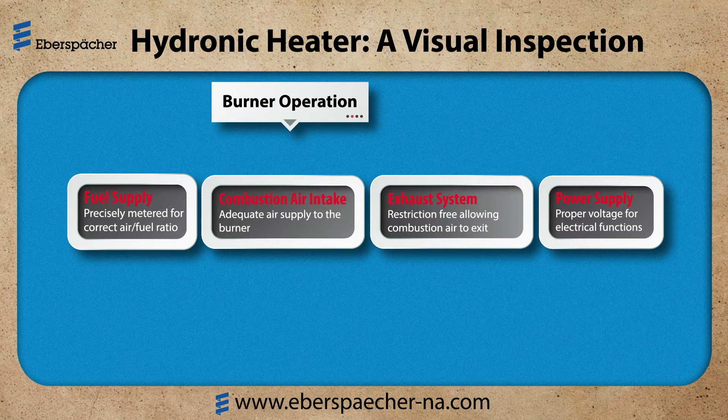Today we're going to go over a visual inspection on a hydronic heater. Let's start with the basics: burner operation, fuel supply, combustion air intake, exhaust, power supply, and connections. We need to keep these things in check for the burner to operate properly, essentially maintaining the correct air-fuel ratio.

Next is the system operation. It's all about the coolant throughput, or the flow of coolant through the heater and all the hoses and components. I always compare our heaters to a diesel engine. Obviously they're much smaller, so some of the things that you think may not affect the engine could have an impact on our heater and how well it operates.

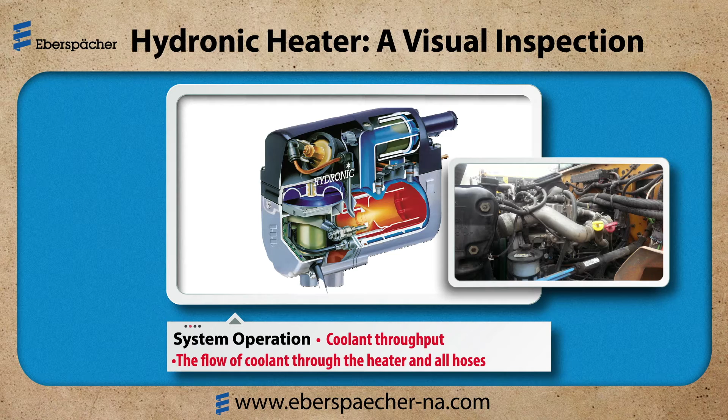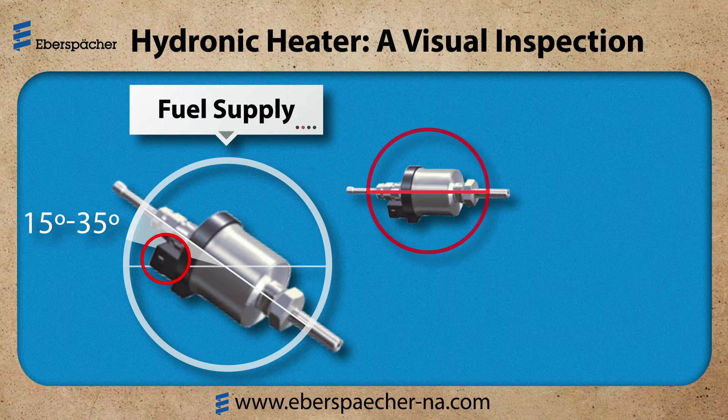First, let's take a look at the fuel supply. The fuel metering pump should be properly mounted at a 15 to 35 degree angle. The electrical connection is on the output side of the pump and should be at the top. If the fuel metering pump is mounted flat or upside down, it will overfuel the heater or could trap air, causing the piston to cavitate. We also need to make sure that the fuel line and wire harness are properly supported and there's enough slack to allow for cab movement.

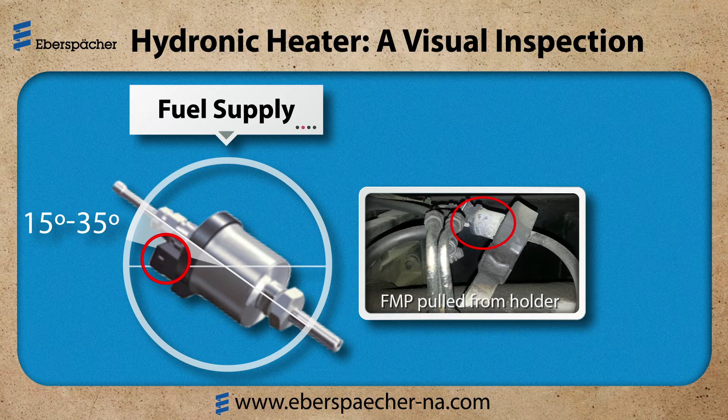In our examples, example number 1 shows an older application. The fuel metering pump is properly mounted, lines and wire harness look good. Example number 2 is a brand new installation. They did not install the bracket that would hold the pump at the proper angle.

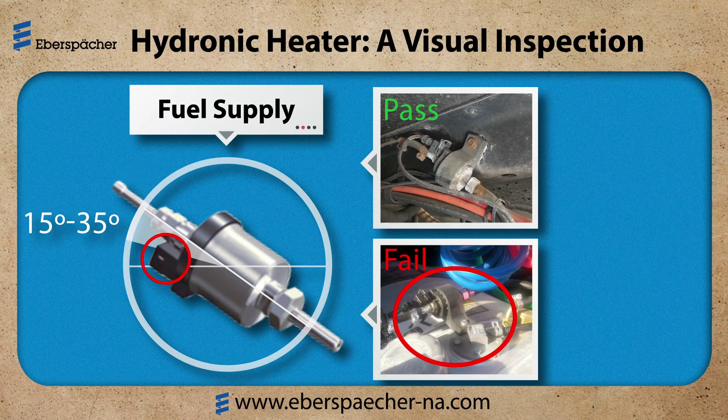Next, we'll take a look at the combustion air intake and exhaust. The length and number of bends in both of these combined will affect how well the air flows through the burner. We want to make sure there's neutral air pressure, so the ends of the pipes are away from the direction of travel. They should be pointed downward at a 15 degree angle, properly supported without any low spots or any tight bends.

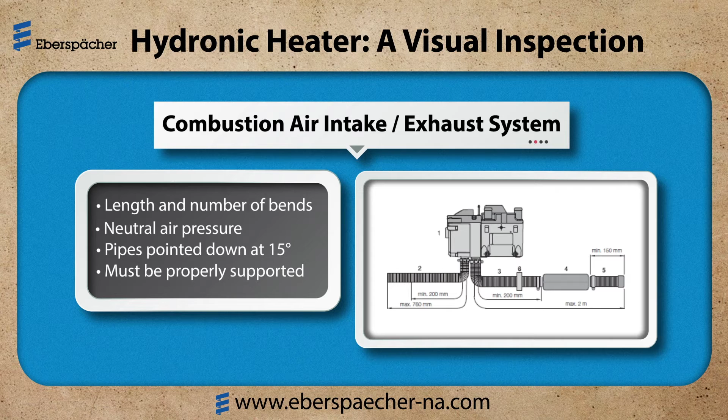Let's take a look at some examples. On the combustion air intake, I have the factory installed rubber boot. This should be at the 6 o'clock position. If it is in the 9 o'clock position, it needs to be rotated downward. This will prevent debris and road spray from entering the intake and getting into the fan motor.

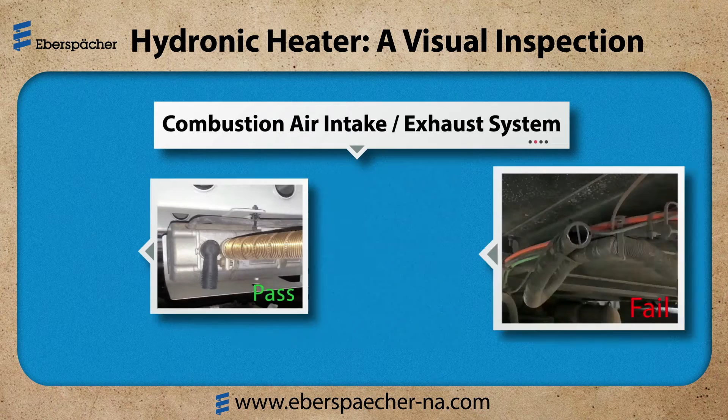On the fail side, I have the flexible air intake coming out to the outside of the cab, and it has a low spot in it. This will collect debris and condensation and cause a restriction.

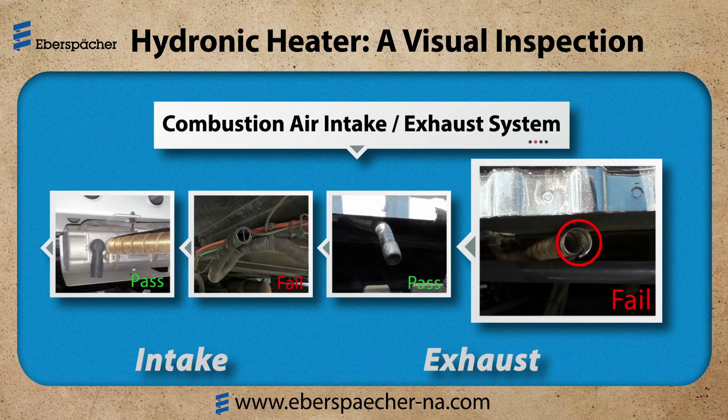The exhaust should extend past the back of the cab and be angled downward. If it is not supported properly, or if it is too long, it can uncoil and break off, as in our other example. This is broken off underneath the cab, and now I have exhaust that could potentially get inside the truck.

Next, we'll look at the power supply, wiring, and connections. Make sure that the wire is properly sized for the length of the run and the amperage draw. We want to check all the connections, make sure they're secure and clean, and we want to make sure the wire harnesses are properly routed and supported.

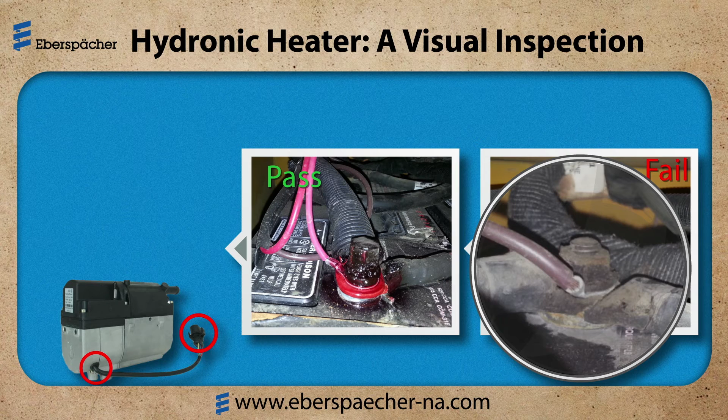The heaters are voltage sensitive, so we need to make sure the batteries are properly maintained. In our example, we have the positive terminal - it's been cleaned and treated, everything looks good. On the fail side is the negative terminal. The insulation was stripped too far back and the terminal was not cleaned. This will eventually cause some corrosion and lead to operational issues with the heater.

Next, we're going to look at the system - the flow of the coolant through the heater, hoses, and all components. I'm looking for coolant leaks. If the system is hot and I'm losing coolant, when it cools down it will suck in air. If there is air trapped in the system, it will cause the heater to overheat and shut down.

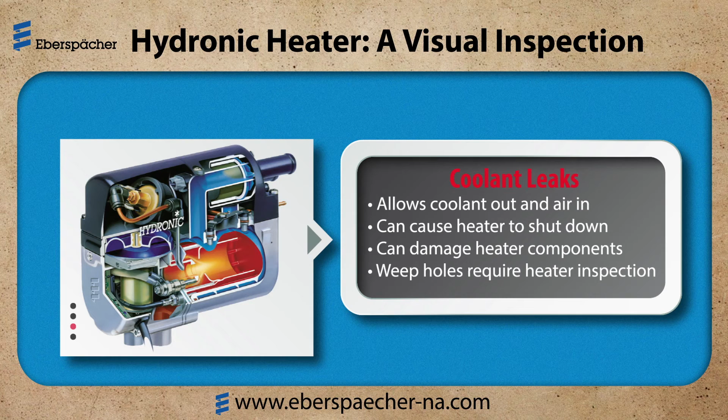I want to make sure that all the hoses are properly supported - no dips, no tight bends, or kinked hoses. I also want to check the weep holes on the heater. If I see coolant leaking out the weep holes, that's a sign that I've got an internal leak in the heater, and the heater needs to be removed for inspection.

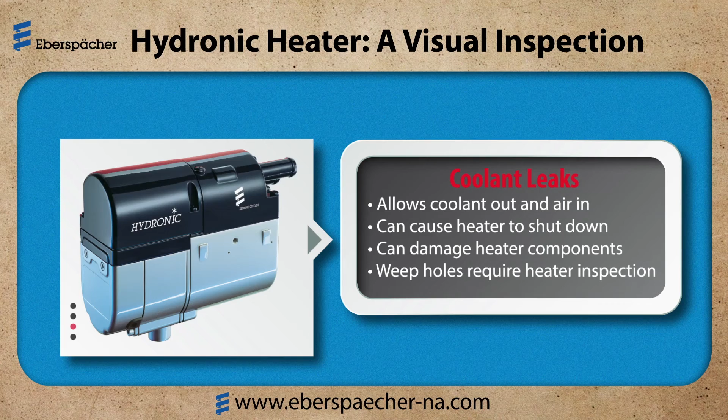That's the quick visual inspection, and it literally only takes a couple minutes to do. I'll walk up to the truck, find my exhaust, follow that up to the heater, then I'll check the air intake. I'll follow the fuel line from the heater to the fuel metering pump and the fuel source. I'll inspect my wire harnesses, and then I'm looking for coolant leaks. This will help me identify issues that are going to affect the proper operation of the heater.

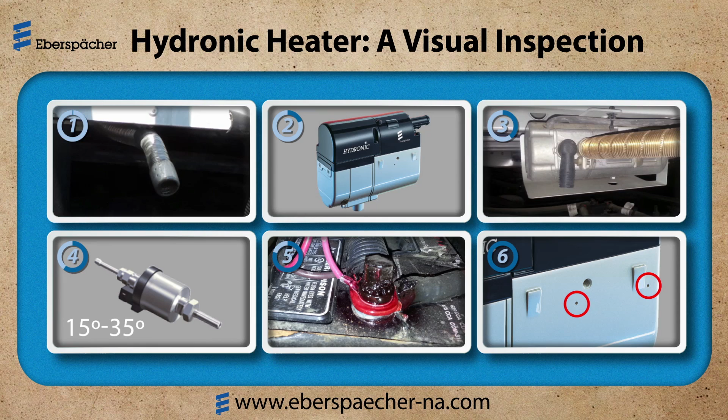These items are often overlooked and are root cause issues. Always conduct a visual inspection before working on a heater. Thank you.